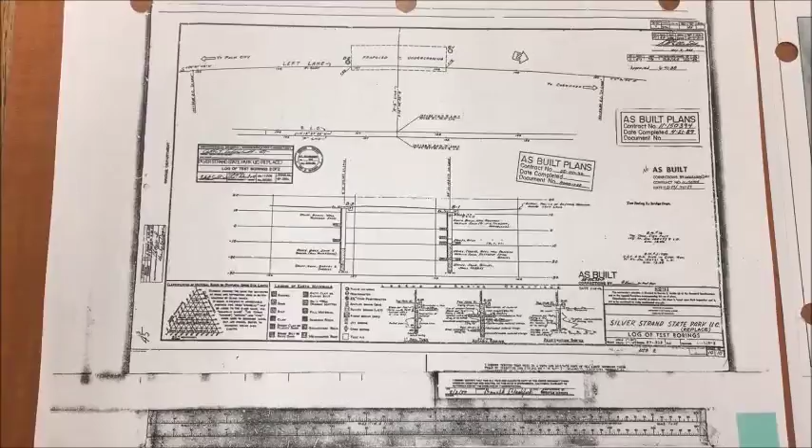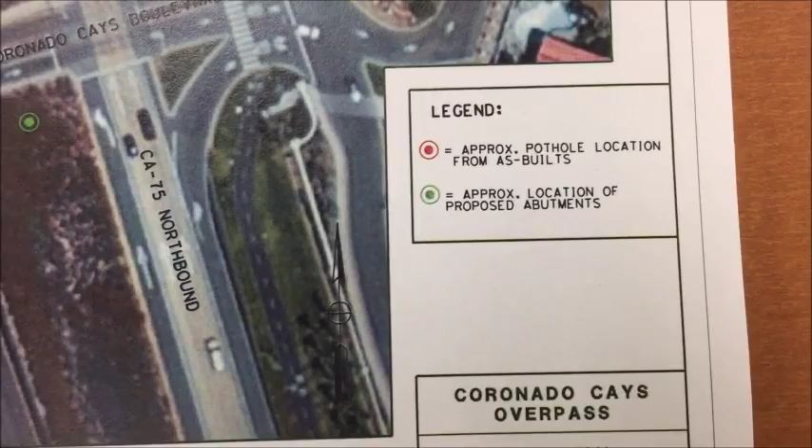Our geotechnical investigation consisted of a visual survey of the site and the review and consideration of previous borings conducted during the replacement of the southbound undercrossing structure. It was concluded that the borings provided an accurate depiction of the subsurface conditions due to the close proximity of these borings to the proposed location of the bridge abutments. It was determined that no geotechnical constraints exist that would inhibit the construction of the proposed infrastructure.

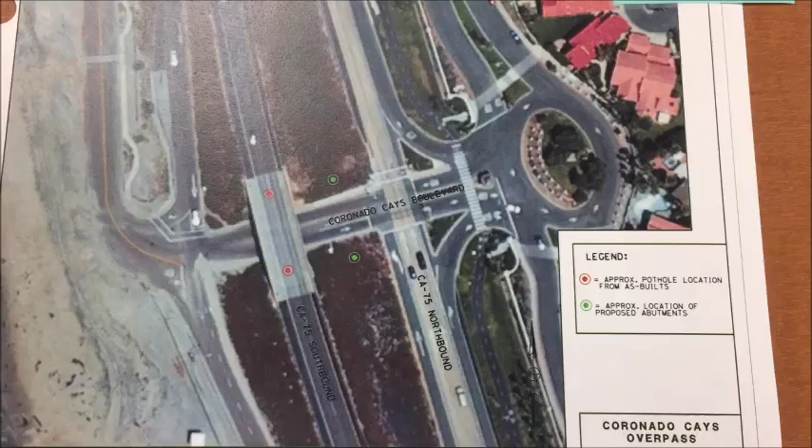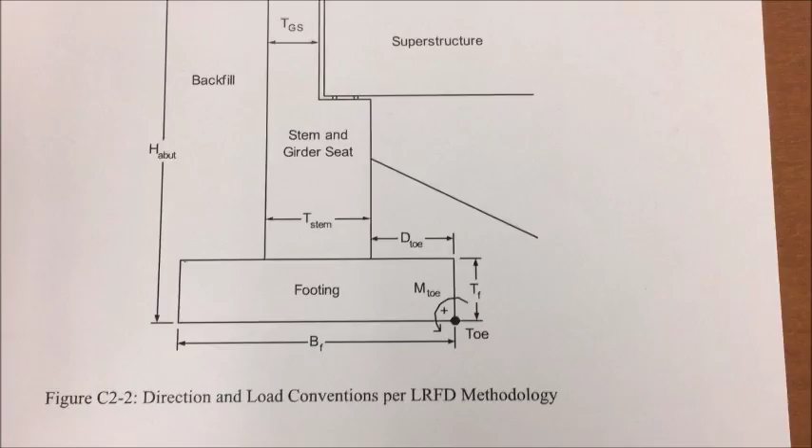The project site contains layers of dense, well-drained soils that possess high bearing strength. Considering this information, the proposed structure may be supported on conventional shallow footings. The low susceptibility of the soils present to liquefaction negates the use of deep foundations. Assuming a seat-type abutment and granular backfill behind the wall, a spread footing is recommended consisting of a 12-foot base measuring 2.5 feet thick. A footing of these dimensions would provide a bearing capacity of 5,000 pounds per square foot.

The urban location of the project required the construction to be broken up into 3 stages to minimize the impact on the existing roadways and ensure local pedestrian safety. Closing either Coronado Cays Blvd or the northbound 75 is simply not feasible. These 3 stages will be undertaken in Phase 1 of the project. Phase 2 will serve to address the ponding issue at the northeast corner of the Coronado Cays and the southbound 75 exit ramp.

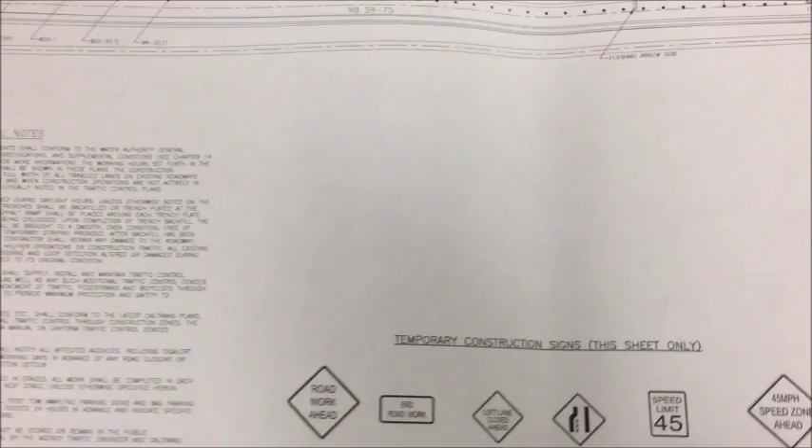Major construction in Stage 1 consists of the bridge, substructure, and preliminary grading adjacent to the bridge abutments. In Stage 2, the remaining grading will be completed and the proposed roadway paved. In Stage 3, the modular infiltration basins will be installed. Throughout the project, the recently developed bike lane will be protected in place and left untouched. In order to maintain safety during Stage 2, a taper was used to close down the left lane. The speed limit was lowered from 65 miles per hour to 45 miles per hour to ensure an efficient taper length that does not unnecessarily increase the project footprint.

So Ryan, how was your stomach feeling during presentation?

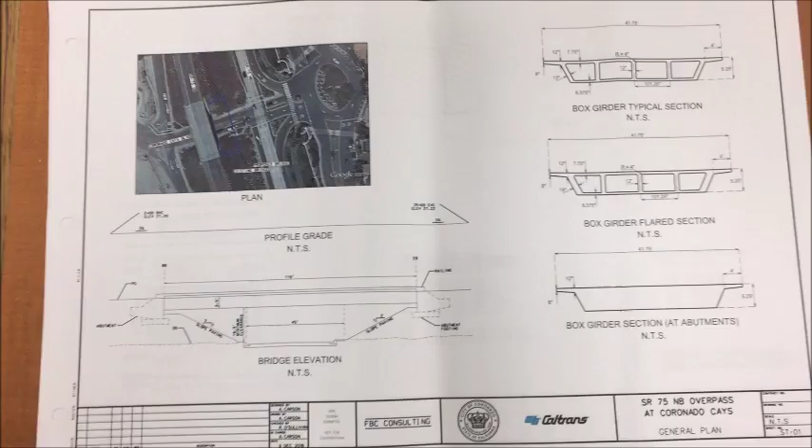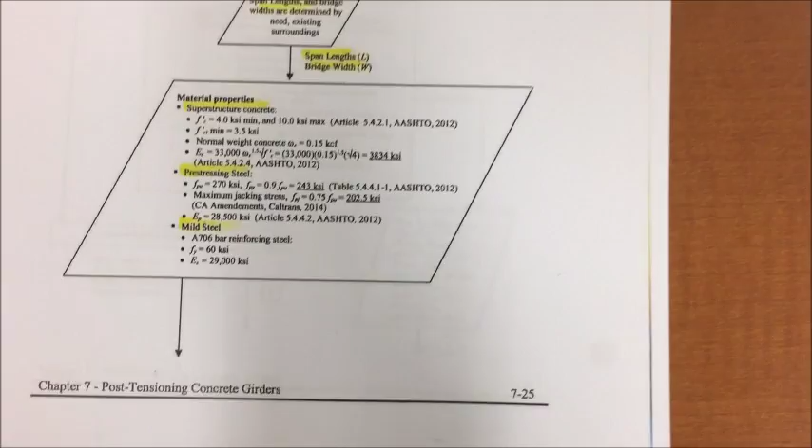The 3 main considerations for the overcrossing structure were that it had sufficient span length, it had sufficient clearance, and also that it could be built without impacting the proposed northbound State Route 75. To design this bridge, the bridge design practice from Caltrans was used, including LRFD design and the Capstone manual. The first phase of design was establishing the 116-foot span and using a standard span to depth ratio to develop the geometry for the box girder.

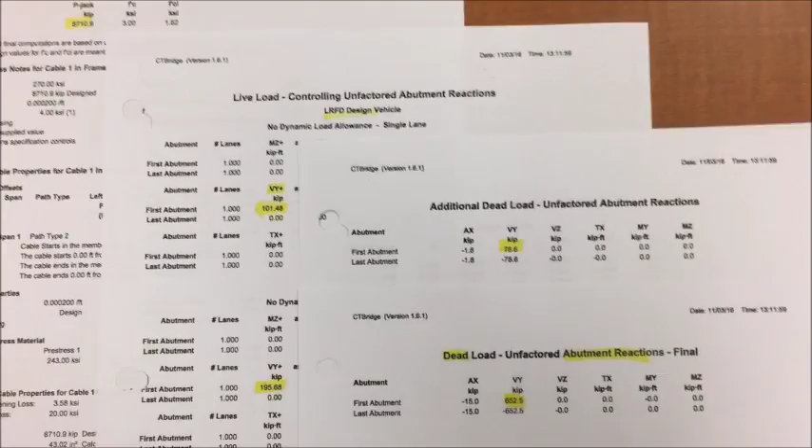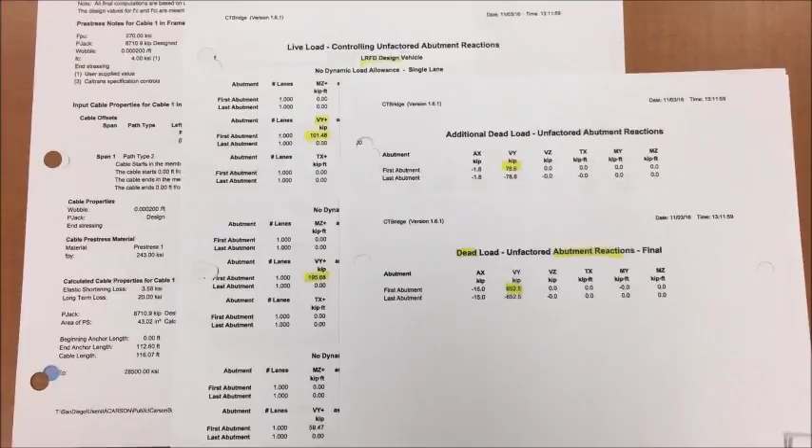A simple cast-in-place box girder bridge was used so that the design wouldn't impact existing traffic while it was being built. Using other bridge analysis software including CT abutment and CT bridge, pre-stressing as well as load conditions and the reactions that would take place at the abutments were derived. Structural details were prepared using the Caltrans memo to designer specifications as well as the information derived from the previous reports. These documents can be used by the contractor in order to prepare all structural components of the abutments and the bridge.

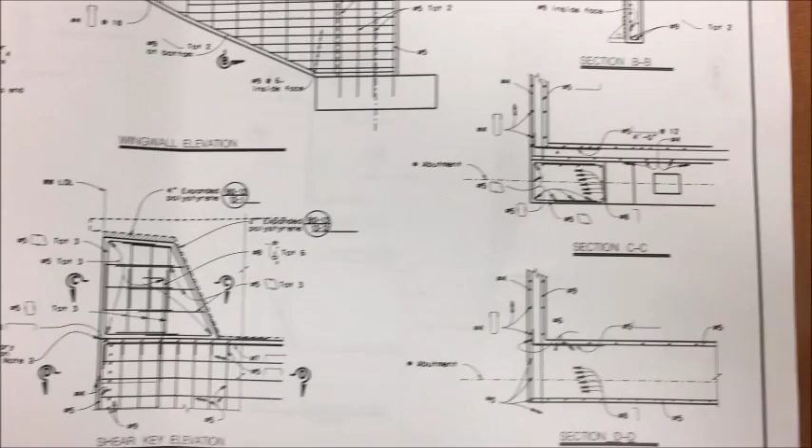So Andrew, what are your thoughts on our design team?

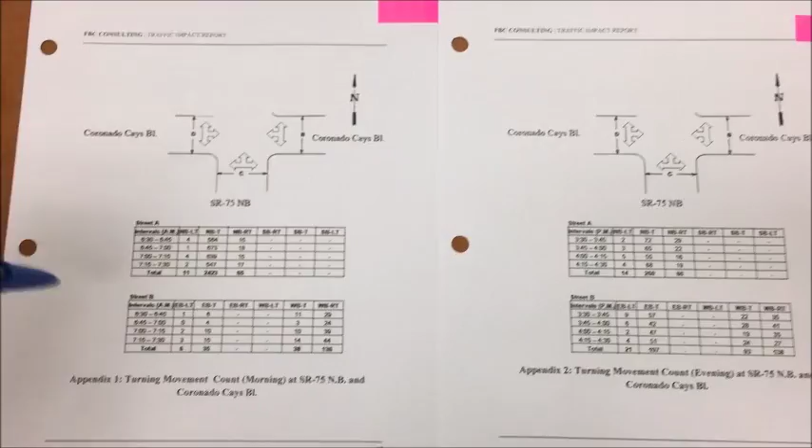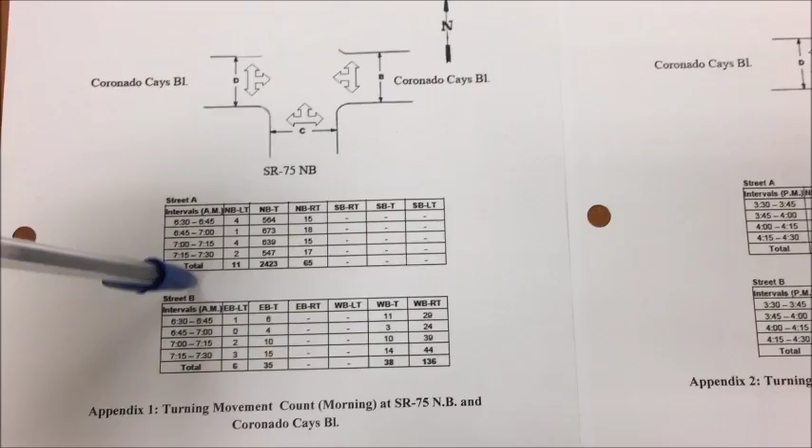So for the traffic and roadway improvements that we're proposing for this project, based on existing vehicular turn movements on the state facility, the left turn pocket is not containing a higher volume of vehicles compared to the through and the right movements. So based on those values that we got for the AM peak hour and the PM peak hour, we decided that for the proposed design, we will get rid of the left turn maneuver.

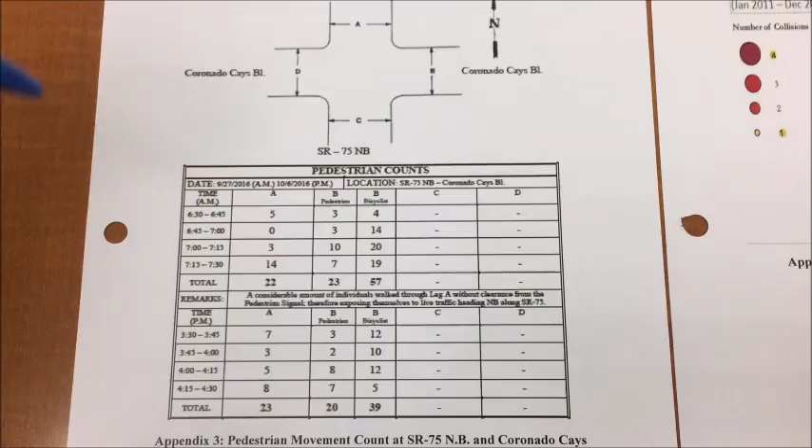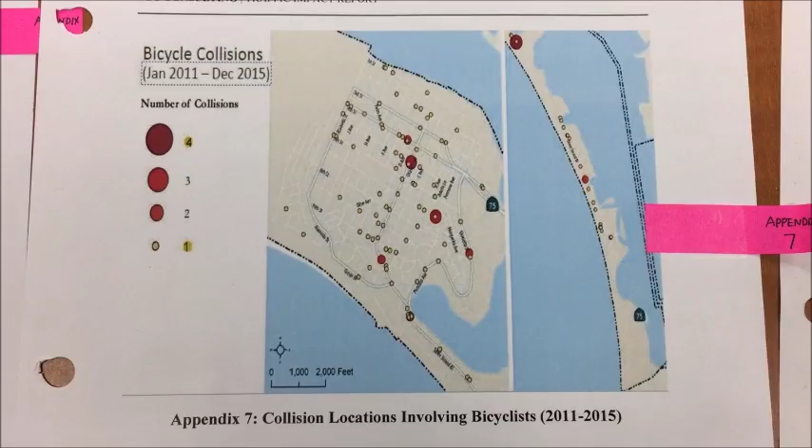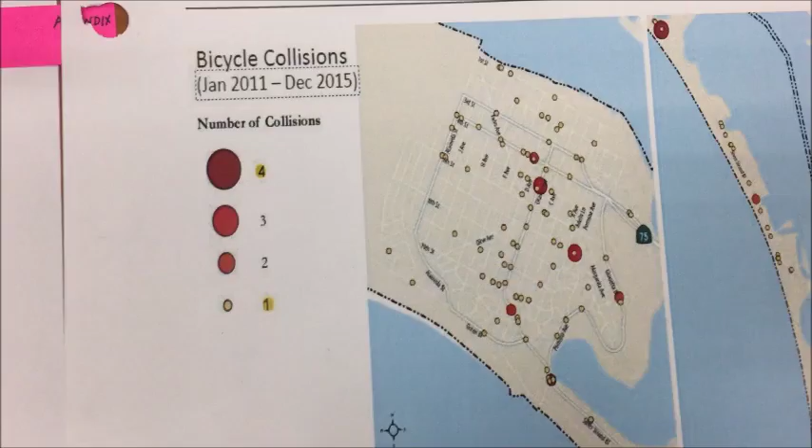We wanted to improve this facility for pedestrian safety based on the pedestrian counts that we conducted on site, but also on remarks that we had on site where some vehicles that were making a right turn maneuver onto Coronado Cays Blvd were having to stop suddenly to yield for pedestrians and bicyclists on the crosswalk for the Class 1 bike path facility. Although the collision rate for this location is very low, the only collision that has occurred in the last 5 years at that location has involved a pedestrian and a vehicle, and we want to improve that situation.

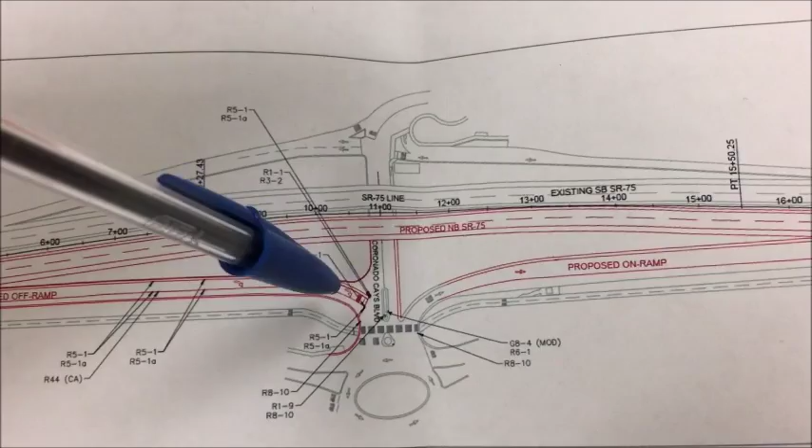So, as it can be displayed in this improvement plan, the proposed off-ramp will be using the existing facility all the way to the intersection, but with a subtle change where the stopping point of vehicles will be a little sooner than the existing one, where the existing one will stop right at the crosswalk. So, as a stop sign controlled intersection for vehicles on the off-ramp, that will provide vehicles enough time and visibility to see cyclists, bicyclists, and pedestrians along the Class 1 bike path.

And also, for the proposed improvements, the overpass was designed to accommodate 16 feet of minimum vertical clearance, such that it will be appropriate for tall vehicles such as semi-trucks and also RVs, which are very concurrent users of this facility to get into the state beach.

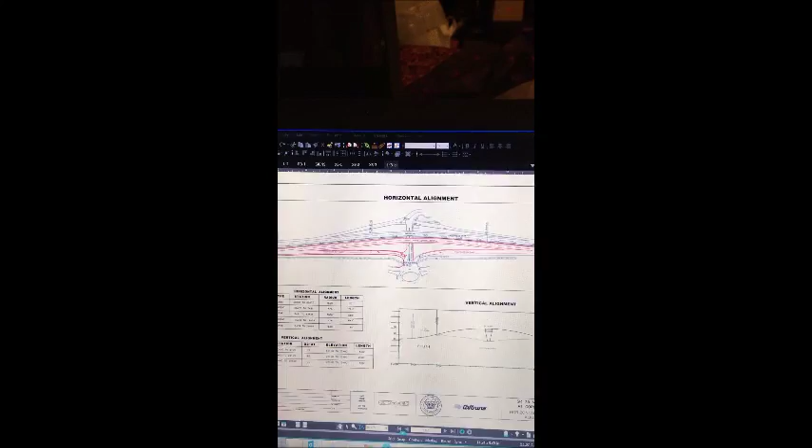For the horizontal alignment, we used different curve designs. However, we concluded that 3 different horizontal curves would be the best approach for the SR-75. By using the design speed along with the highway design manual, we designed the curves to have a radii of 1600, 3000, and 1600. The proposed northbound will be approximately 20 feet away from the southbound approach on the SR-75.

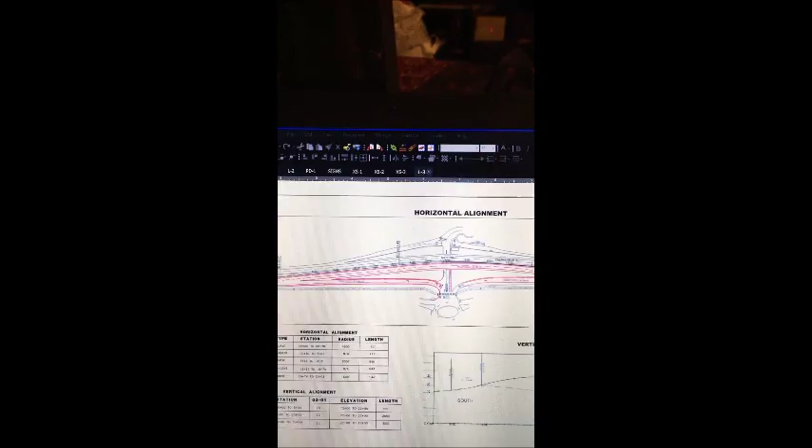There are several purposes for the shift in the proposed horizontal alignment. One being that the shift will provide enough clearance space for the proposed off-ramp, while the others for construction purposes. Having a shifted horizontal alignment on the proposed SR-75 avoids full lane closures and allows traffic to continue flowing at all times.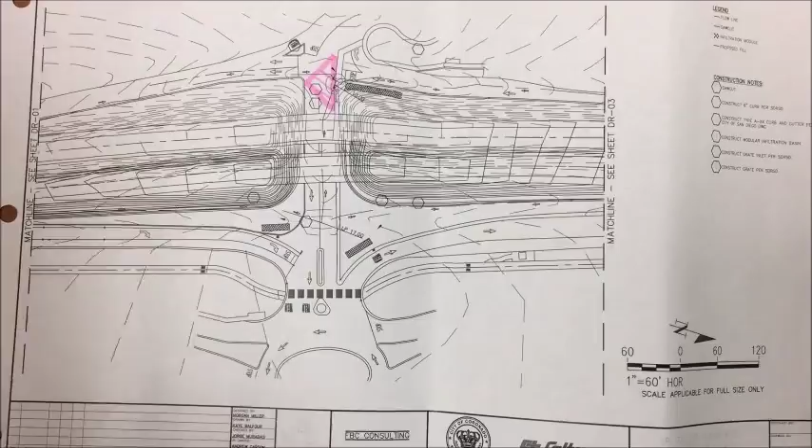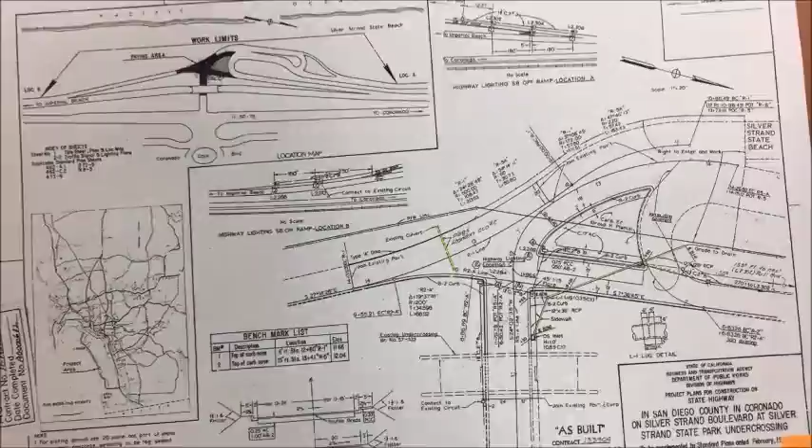The purpose of this hydrology study is to show that the proposed conditions for Coronado Cays northbound State 75 Overpass will not negatively impact existing hydraulic conditions, as well as to address ponding that occurs on the northwest corner near the southbound off-ramp. According to the as-built, there is no current drainage system, and you can see that the 12-inch pipes were abandoned in 1969.

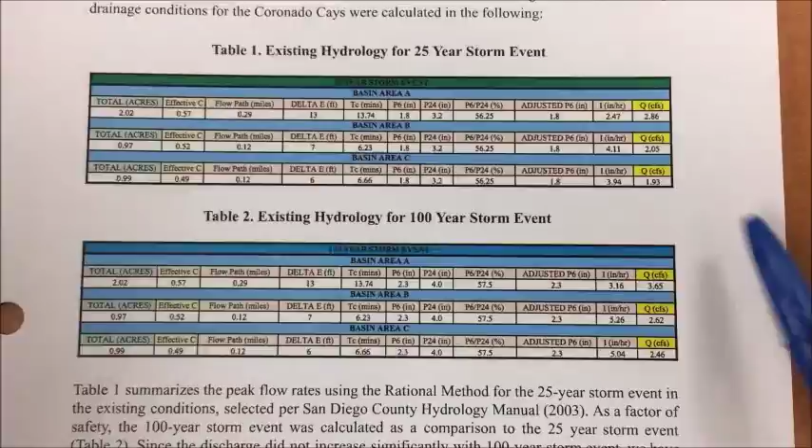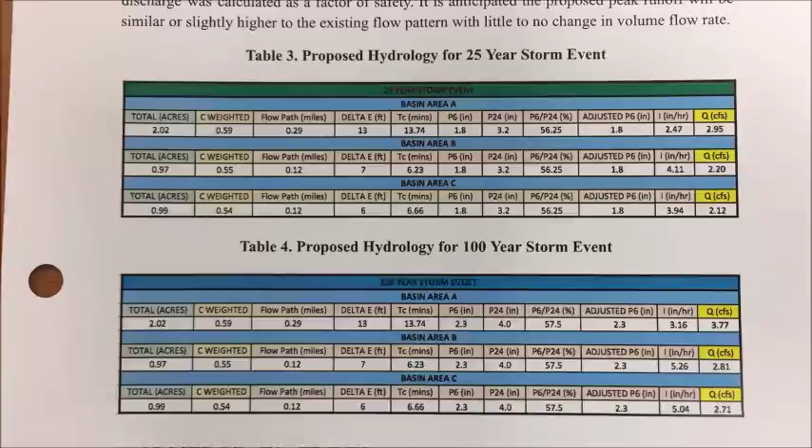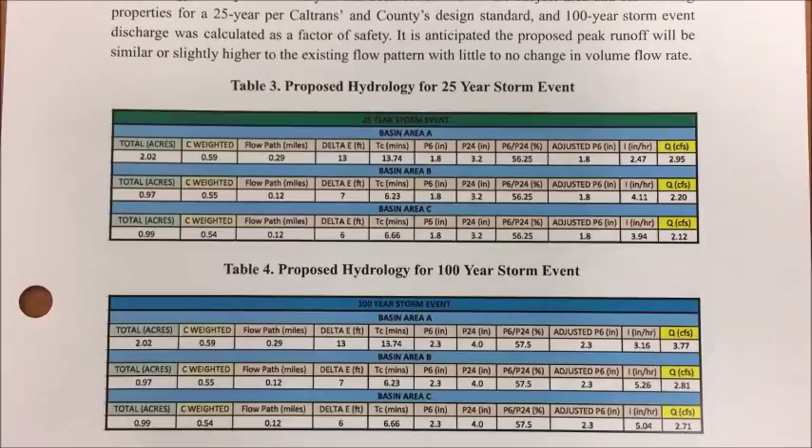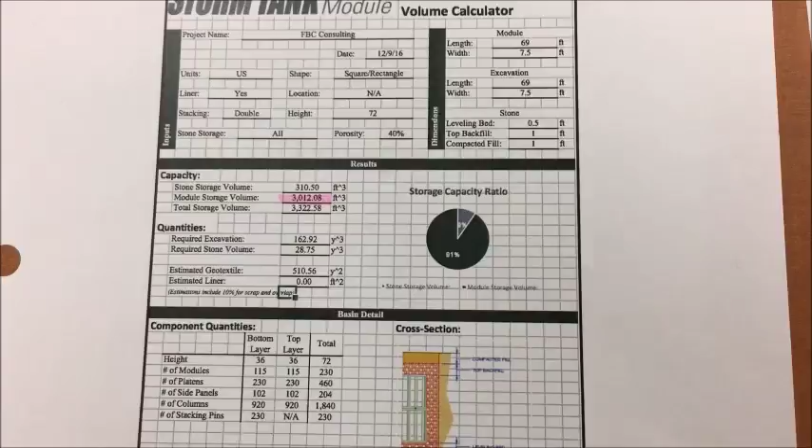FBC Consulting has proposed 3 modular infiltration systems, 1 where the current ponding issue occurs, and 2 additional modular infiltration systems for the proposed system. Here are some calculations showing the modular storage volume. For simplicity, drainage basin B and C have been used with the same specifications. For the basin area A, there is a total storage volume of over 3,000 cubic feet, and for B and C, there's about 900 cubic feet of storage.

Drainage basin area A has an inlet to a proposed pipe into the modular infiltration system. As for B and C, there was a proposed horizontal grate that goes into an 18-inch PVC pipe into the modular infiltration systems.

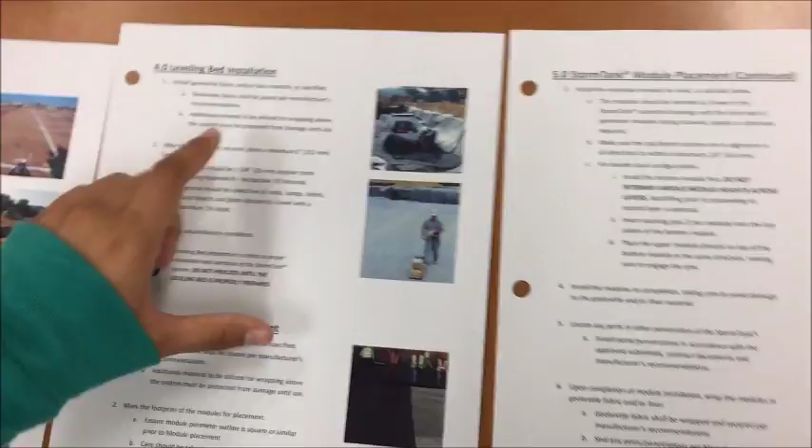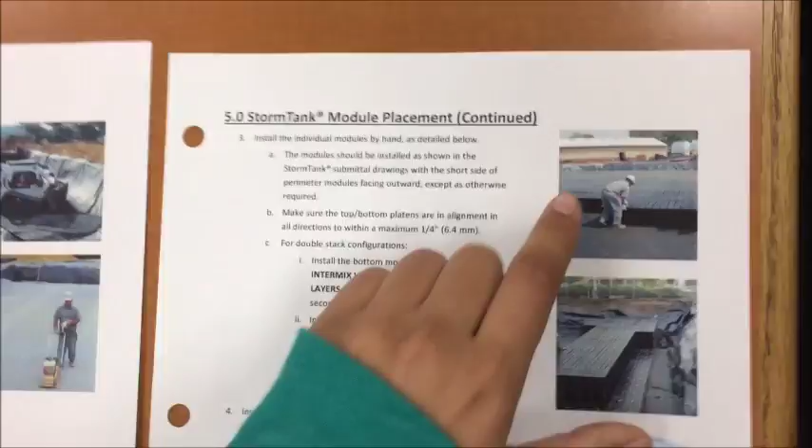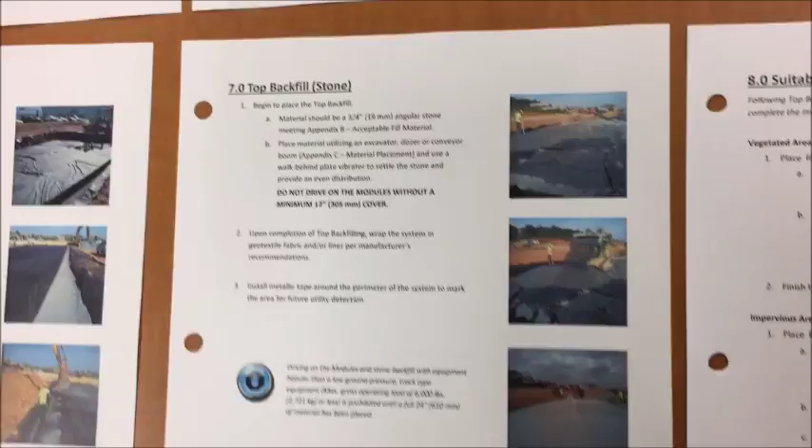As for the installation of the modular infiltration systems, it starts with a simple basin excavation. Subgrade requirements, leveling bed installation with a 3/8 inch gravel. Then comes the placement of the modular infiltration systems. From there, they are placed depending on the size of the proposed system. A side backfill of the same type of gravel is installed, and then finally wrapped with a geotextile, and then covered with the existing soil.